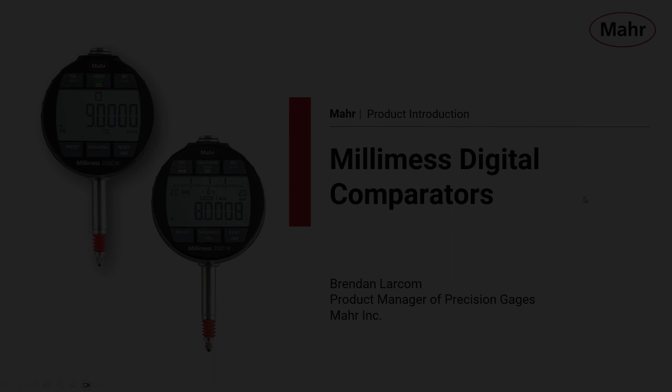My name is Brendan Larcom. I'm the product manager of precision gauges at Mahr Incorporated. Today, we're going to be talking about the Millimess digital comparators. We're going to be talking about some of the features and benefits and some applications and target customers and some competitive analysis.

And we're going to be talking about how our customers and our end users can really benefit from the overall uses of this gauge, what sort of target industries are really useful for this gauge, and in general, how we can go out there and really solve some of our customer problems and make good with the customer.

So we're going to start off with features and benefits. Then we're going to go to applications and target customers, and then we're going to do a little bit of a competitive analysis at the very end before I open it up for questions.

Okay, so today we're going to be talking about the Millimess 2000 and 2001, the W and the WI. There are four variations of this basic comparator. From our 30,000 foot view down, top line notes, these comparators have really high accuracy. They have a base error of 0.4 microns or 16 microinches.

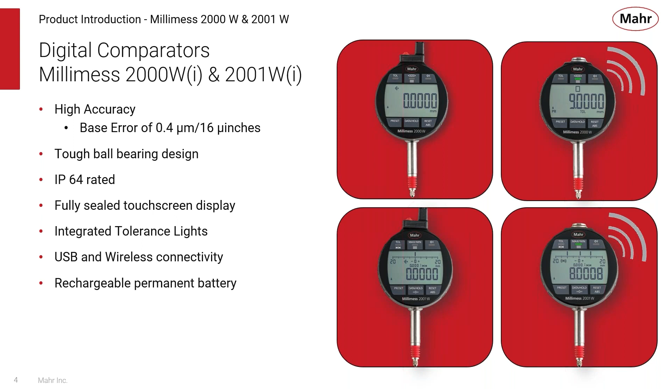In addition to that, it is IP64 rated, and it features a fully sealed touchscreen display. We'll get into more details about that further into the presentation. It has integrated tolerance lights, USB and wireless connectivity, and a built-in rechargeable battery.

So the technology behind the Millimess 2000 and 2001 is a very well proven technology that's been used in the metrology industry for decades now, called LVDTs. Accuracy, which you can see listed here, that 0.2, and then the more you get away from the null point of the probe, you get more and more inaccurate.

So as you can see from the specs below, the VLDT, the very linear differential transducer in the Millimess, is based on Mahr's P1301 probe. Again, with that high precision ball bearing with low friction, high sensitivity, and very, very stiff. So there's not a lot of play in the motion of the comparator. It's very, very accurate for that reason.

It's going to have a small measuring range, plus or minus a millimeter. But as we know, with metrology equipment, the more range you add to a product, the more inaccurate it becomes. So that's one of the trade-offs we have for such a high accuracy in this digital comparator, that we have a shorter range.

But as you can see from the table there, listing what sort of error limits you can see at the absolute range, even when you go to the full ends of scale, plus or minus 1 millimeter, your error limit is only going to be 1.4 microns, plus or minus 0.7. So again, very, very proven technology, very capable, very accurate.

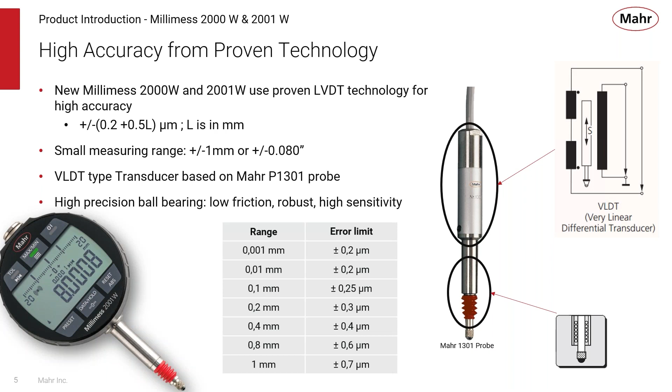So we're going to go into a little bit of the difference now between the 2000W and the 2001W. The main difference between the two models is the 2000W and the 2000WI are for static measurements. They have 11.5 millimeter tall digits. They have symbols for tolerance functions. They can do go, no go, and warning limits.

And what I mean by static measurements is that it just continuously takes a live reading. Whatever the instantaneous reading from the probe is, that's what's going to be put on the display of the comparator. Whereas the 2001W and the 2001WI can do static and dynamic measurements. By dynamic measurements, I mean a max, min, or a TIR.

When the max or the min function is turned on, the comparator will capture and hold the highest reading if you're in max mode, the smallest reading if you're in min mode, or the difference between the max and the min, which we call our TIR, or total indicator runout. These are very good for finding more complicated features on, say, round parts.

So if we're looking at a shaft or an ID, we can very easily see the biggest diameter, the smallest diameter, or the variation in diameter using the TIR mode. To help with the TIR mode, we sacrificed on the digits. So instead of being 11.5, they are now 9 millimeters tall. But to offset that, we now have a scale and a running pointer.

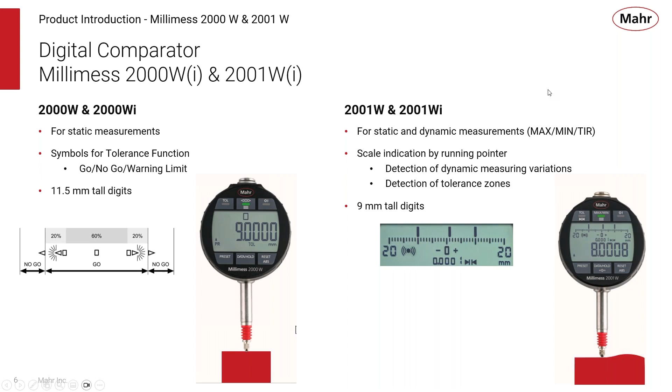So even though the digital display, when it's in max, min, or TIR mode, will be displaying and holding that max, min, or TIR value, you can still track the movement of the indicator by watching the pointer going through the tolerance zones on that horizontal scale indicator.

I think the greatest feature of the Millimess is this sealed touchscreen display. As you can see on the Millimess 2000W and the 2001W, it's a fully sealed touchscreen, highly resistant to the intrusion of oils, lubricants, and coolants. The glass itself is fully tempered against scratch and shock. It's sensitive enough to be used with gloves. And Mahr will also offer optional screen protectors and cases for additional protection from the dangers of the shop floor that these gauges often live on.

So again, if you take a look at the slides here, you can see there are no buttons. Everything is completely touchscreen. And what that really helps out with is stopping the incursion of foreign debris such as chips or dust or dirt, coolant, cutting oil, any kind of liquid from getting inside of the 2000W and the 2001W.

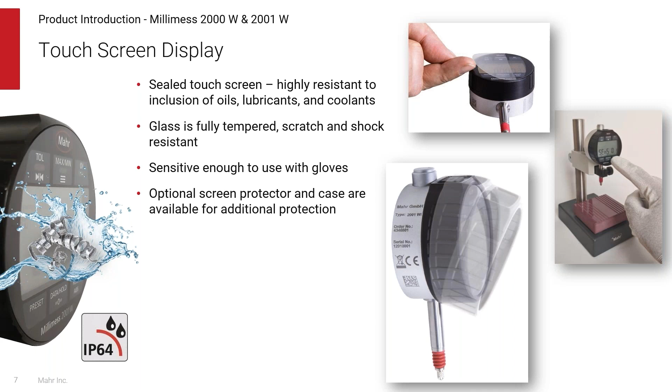It makes these gauges very, very robust, and you'll hear me talk about this later, but really ideal for any sort of highly dirty environment where you need to be very accurate. So think grinding, think honing, anything with oil or diamond dust or cutting fluid. The 2000W and the 2001W really lend themselves to that sort of environment because of this touchscreen display.

Moving on, both the 2000W and the 2001W have integrated tolerance lights. They're built into the top row of buttons, where the light all the way on the left-hand side is going to be red for your no-go. Your middle light will be green for go, and your button all the way on the right with its light will be yellow, telling you that you either need to rework or you're approaching your tolerance.

You can, of course, program those tolerances, and you can also program nominal values. Warning limits themselves you cannot program exactly into this gauge, but you can set the warning limits to be at 10, 20, or 30% of the total part tolerance.

When the Millimess 2000W and 2001W are on battery power, the lights will flick on and off as you pass through the tolerance zone. But if you're on main power and plugged into either a computer or a wall outlet where the battery is continuously getting power from an outside source, the lights will continually stay on.

So in the real world, what does that look like? Well, if you're measuring a part, the minute it goes in tolerance, the green light will flash and then go off. But the minute it crosses from in tolerance to out of tolerance, the red light, the no-go light, will flash and then turn off. Same thing for the yellow limit, for the rework and the warning limit.

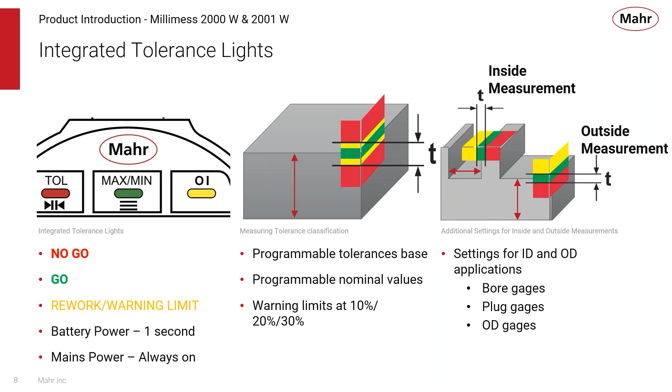And depending upon what type of application you're using, you can see in the pictures below how the warning limits and the tolerance limits really work. If you're doing a straight height measurement, your go zone is going to be right in the middle there, surrounded by your warning limit. Then you go out of tolerance into your red. Same thing if you're doing an inside measurement, you can see the rework is going to be on the inside of the ID, and then as you get oversized, you go into the red zone.

Both the 2000W and the 2001W have connectivity to a computer, so you can do data export. This is going to be one of the differences between the 4 variations of this Millimess 2000 gauge: if it has the I after it, integrated wireless is available, on the 2000WI and the 2001WI. That uses Mahr's integrated wireless technology. We use an ANT+ wireless protocol that allows for on-demand data transmission, which extends the life of the battery of this unit.

When you're using our integrated wireless system, that works in conjunction with our MarCom Professional data transfer software. The MarCom Professional software is completely free. You can go onto our website, www.mahr.com/MarCom, and download the software for free. No registration or purchase required.

And with that MarCom Professional software, you can remote control or remote program the unit, and you can also set the unit up for operator lockout, so that when it's on the shop floor, it cannot be manipulated by operators unintentionally or intentionally.

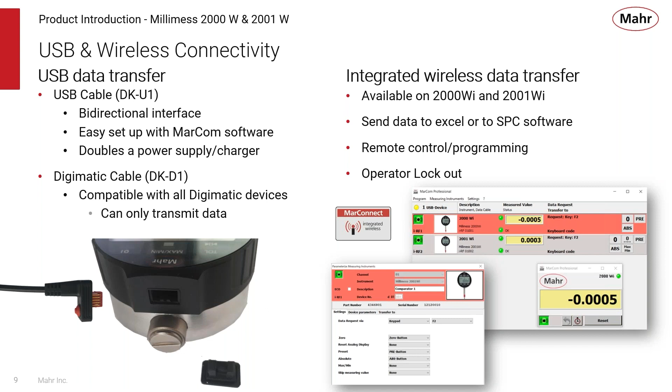As I mentioned earlier in the presentation, the Millimess 2000 and 2001W has an integrated rechargeable battery. It's a lithium-ion battery, which has 150 hours of runtime built into it, and it takes 12 hours to fully charge. So if you're doing mobile measurements, if you have this on an inspection cart where you have a roaming inspector going from machine cell to machine cell, the comparator can run off of its internal battery power to collect measurements.

Or if you're using this gauge in, say, a portable bore gauge, like a sweeping style bore gauge or a Diatest or Dimentron plug, or a split ball plug like the 844K that's offered by Mahr, you can also run off the battery power. And again, you get 150 hours of runtime in that configuration.

The 2000 and 2001W can also be run purely by wall power coming from the USB data cable. That's going to lend itself for more stationary and permanent style gauges. So when we get to applications later, when we go through the ID/OD gauging, these comparators are permanently in place, they're on a gauging bench, they don't move. Parts come from the machining cell to the gauging bench to get checked.

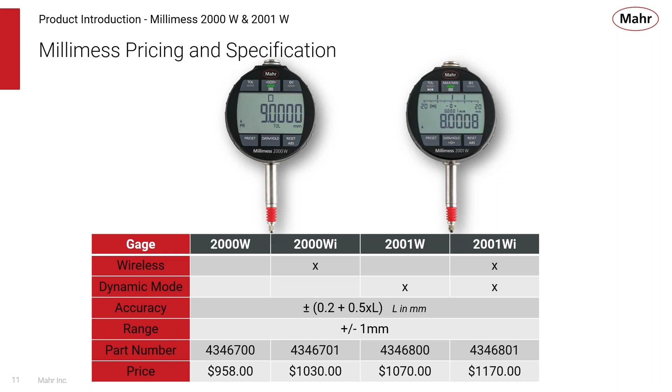We also have a lug back that can be swapped out on the back of the unit. So if you don't want to mount this by the stem, you want to mount it by a lug back, you can remove the back that comes with it, and you can put the lug back on in either a horizontal or vertical configuration.

We also have a variety of different measuring force springs. So if you need to have a certain total dead load coming from the comparator, from the 2000 or the 2001, we have optional springs that you can swap out the stock spring for to get the exact total dead load you need for your application.

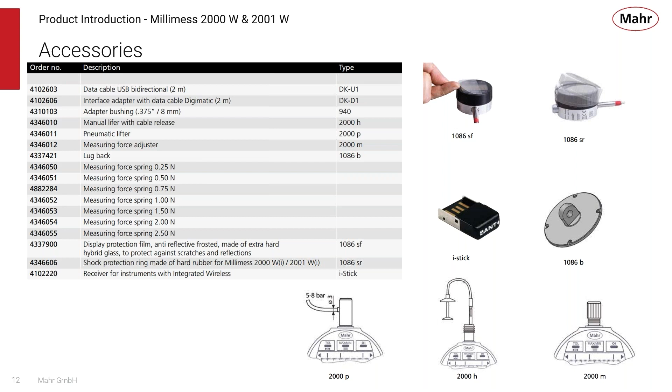So before, you saw our pricing, and I'm sure some of you got a little bit of sticker shock there, but when you look at the level of performance that you get out of the 2000W and the 2000WI, including the wireless variations, you're getting a base accuracy of 0.4 microns, and selectable resolutions all the way down to either 5 millionths of an inch or 1/10 of a micron. Typically, to get that level of accuracy, you have to get a gauging amplifier and a probe. The equivalent from Mahr would be the C1200 and the 1301 probe. When you compare the price point there of $2,205 compared to $958, you're almost double the price for the same level of accuracy and resolution.

And as we all know, accuracy, resolution, and price are really the three things that drive a customer's decision-making process when they're selecting a gauge for their application, for their factory. They're looking at what level of performance they can get at individual price points. So we're very proud to offer the Millimess 2000W and the 2001W at the price points we are, where you're getting the same performance you traditionally need out of a comparator or an amplifier and probe system that would traditionally cost double what the Millimess 2000 and 2001W would cost. So again, great value for money.

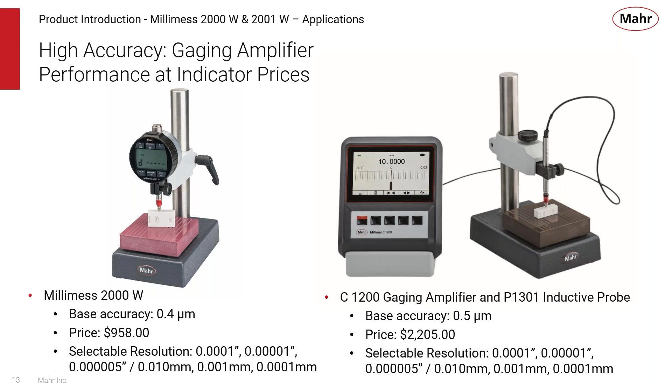We feel like this is going to be highly successful with our customers where they have any type of high accuracy requirements, or if they are looking to move away from the gauging amplifier and probe system, where maybe they need a smaller form factor. The Millimess 2000W and 2001W really goes a long way, giving them that performance at a smaller price point.

So now we're going to talk about some particular applications for the 2000 and 2001. Any of you who have spent any time in a gauging lab will recognize the C.E. Johansson Mikrokator. The C.E. Johansson Mikrokators were Swedish made. It's a legacy gauge from the 60s or 70s.

They were made all the way up into the 80s. They are a purely analog comparator, no electronic parts, all just gears and springs in there. They can repeat to 1 millionth of an inch. They have a highly specialized movement where you basically have two coils that get wound tighter and looser. Basically, as the contact point moves up and down, and then as that coil gets tight or loose, it moves the indicator point on the Mikrokator.

Very, very specialized gauge. It really is a legacy gauge, and not that it's old. It's legacy in terms of its prolific presence in the metrology space. These were one of the first gauges that could repeat down to the millionth. Great certainty and accuracy. Really great gauge. They were used all over the world. You'll see them all across the country in gauge labs, precision honing centers, on the shop floor, where anybody's really looking for high accuracy applications.

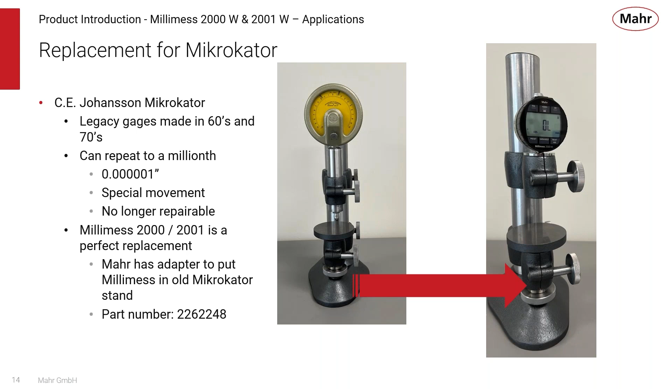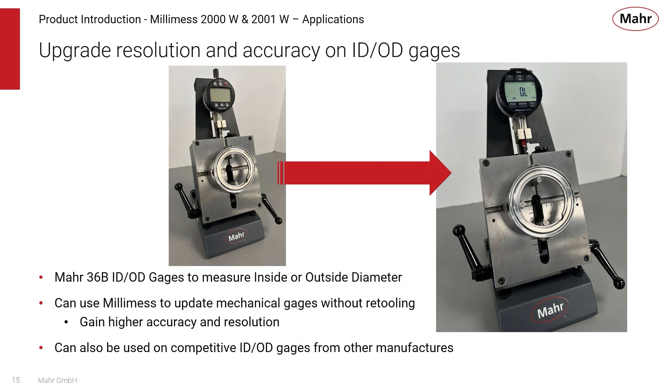It's a great way to upgrade your gauging capability without having to completely retool or buy new gauges. You're basically just buying a new display that will give you increased resolution and increased accuracy. And again, this will not just work on the Mahr 36B ID/OD gauge, but it will also work on competitive ID/OD gauges from other manufacturers, such as Mitutoyo, Starrett, Fowler, any of them out there.

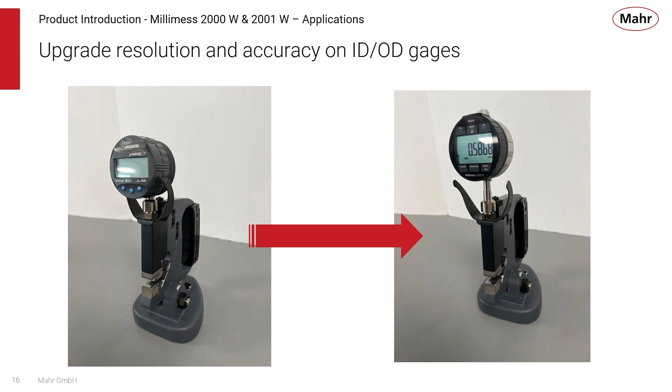So anywhere where you're using a snap gauge, you can put a Mahr comparator right in there, and you get that increase in performance. And again, it's a standard 8mm shank. So this will work not only on Mahr or Federal snap gauges, it'll work on Fowler, Mitutoyo, Starrett, basically any OEM snap gauge that's out there on the market, and it'll swap right into place.

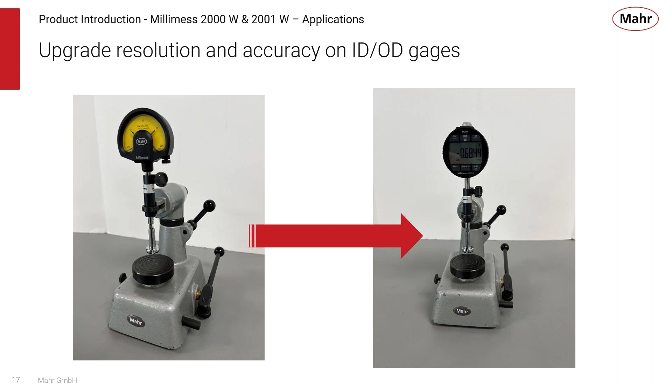Split ball bore gauges like this are very, very common for high accuracy applications or any type of application where you're measuring an ID. Again, you can just swap the Millimess 2000 right into that gauge and get increased accuracy and resolution. It'll also work on Sunnen style bore gauges, Dimentron style bore gauges, or Diatest style bore gauges as well.

Finally, we have some target industries for the Millimess 2000 and 2001W. Again, I've been saying this a lot during this presentation, but they are really ideal for any sort of grinding, honing, or lapping operations. Anywhere where you're turning down a shaft or doing a finish hone on a bore, where you really, really care about the fine resolution.

If you're talking inches, you're getting down to the 10 or 50 millionths, or even finer, down to the 5 or 10 millionth spot. Or if you're talking millimeters, once you're getting down to that sub-micron level of accuracy that you see in grinding and honing operations, the Millimess really lends itself to that type of environment and those types of measurements. And that's purely going to come down to that touchscreen display, the IP65 rating, and again, the high accuracy that you get from that LVDT.

So some target industries from that are going to be any type of bearing manufacturer, hydraulics, medical device, aerospace, and automotive, or anywhere where you're seeing any type of grinding or honing or lapping, where you need that extra level of accuracy and your gauge needs to be able to survive in that type of environment. The Millimess is really going to lend its way into that type of application.

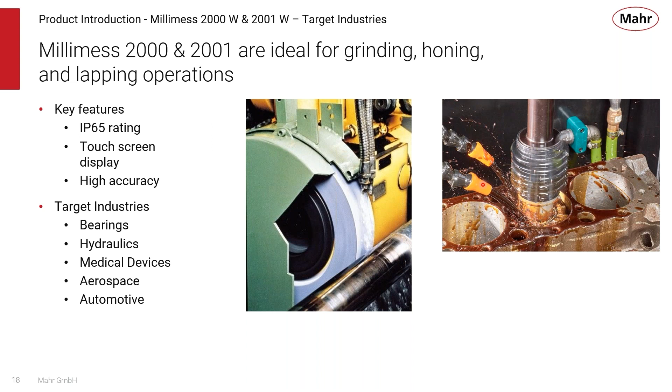Because as we know from grinding, honing, and lapping, you get a lot of dust, you get a lot of dirt, you get a lot of debris. If you have any type of a lubricant, like I have on this picture over here, or cutting oil, if you've ever worked with that stuff, as you know, it's very nasty, it smells, it gets into things. And because the Millimess 2001W has that touchscreen display, it really lends itself to those dirty, nasty environments where you have to be concerned about that sort of thing.